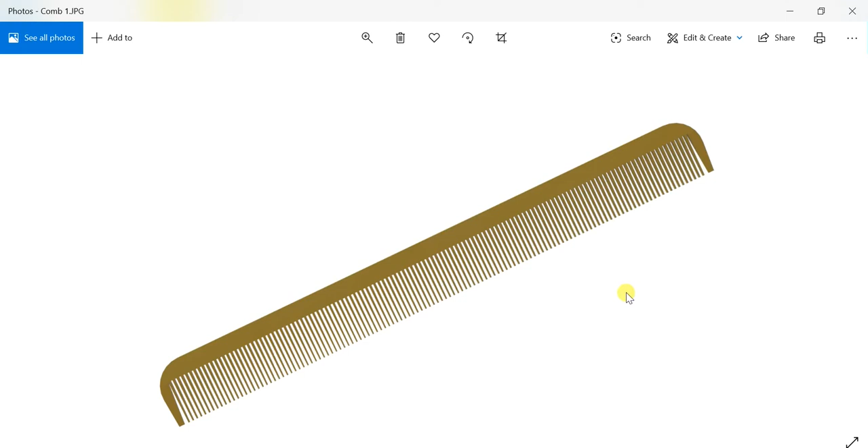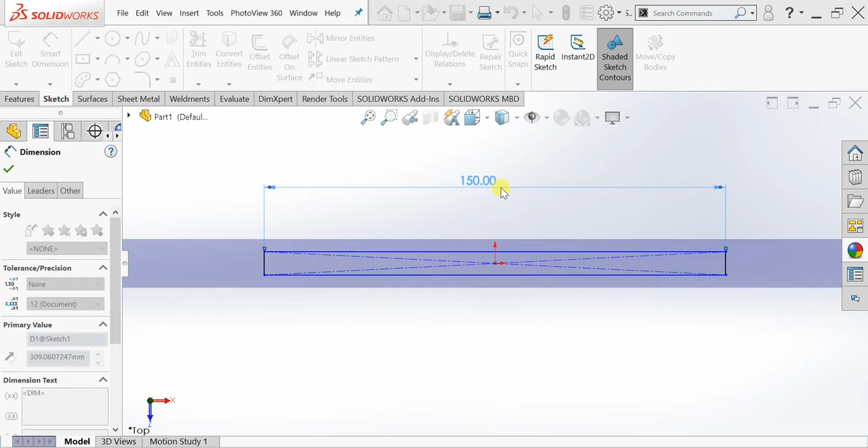Firstly, we will choose the top plane, sketch command. Just draw one center rectangle. Select this smart dimension command so that we can give dimensions to it. Select 150. All the dimensions are in mm. This length you should keep as 7. Okay.

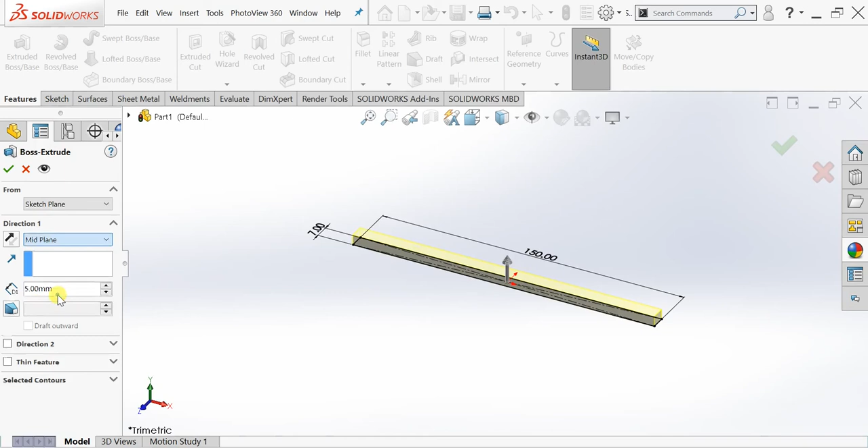Then feature extrude boss. Extrude it up to 5. Try extruding it as mid plane. Okay, for better visibility you can change the background. I have selected white. Now go on this side of the job and try sketch on it. If you press spacebar you will get an orientation tab in which you can select the front view.

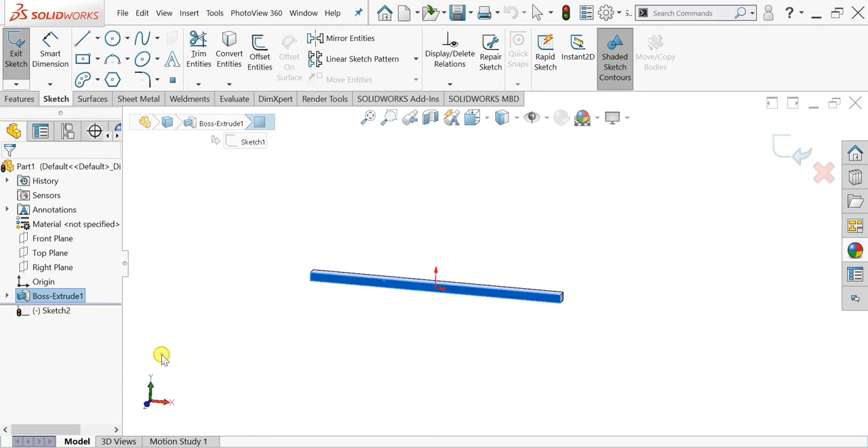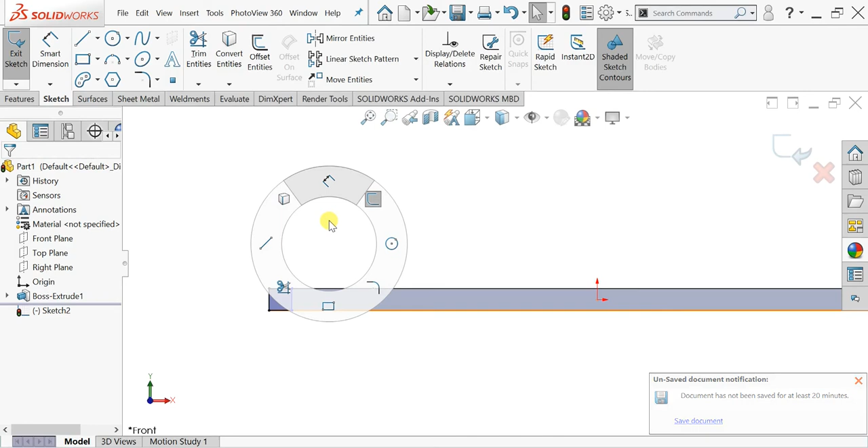Now draw a corner rectangle here. So SolidWorks gives you this kind of features. If you right click and hold it, you will be able to see this kind of a circle in which you can select many commands. So if I press right click and hold it and then press it towards this, I will automatically select the smart dimension command. So now you can give this as 5.

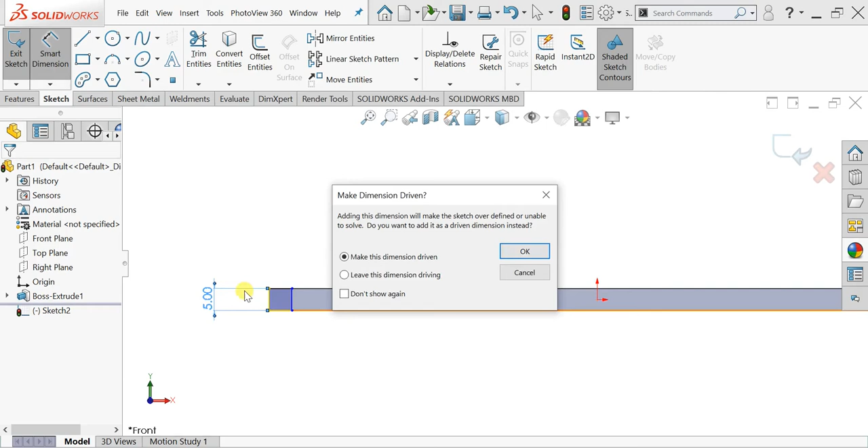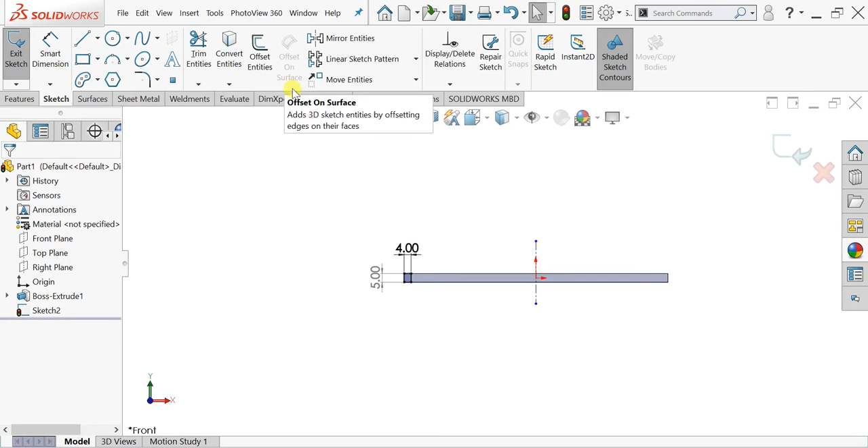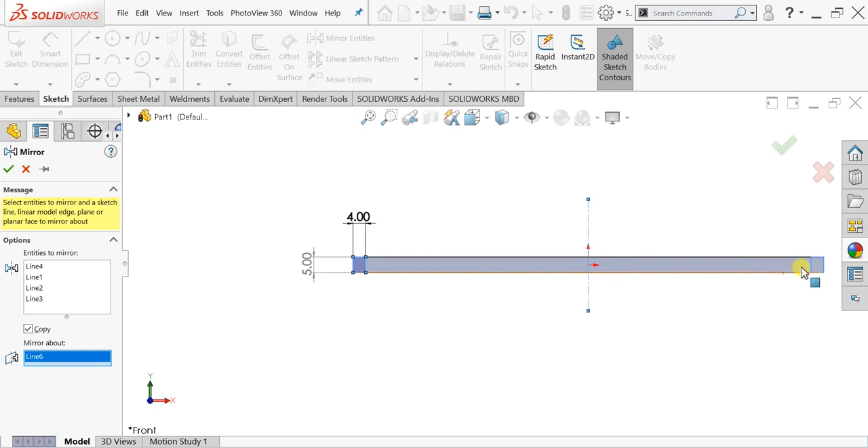It is coincident to both the edges, and the thickness of this whole plate is 5 mm, so it is automatically set. This we can set to 4 mm, and then select OK. Draw a center line and select this sketch and press mirror entity. So it will ask you entities to mirror, which is this entity, and to mirror about, that is where the reflection has to fall, which is this. So if you can see clearly, it has appeared here.

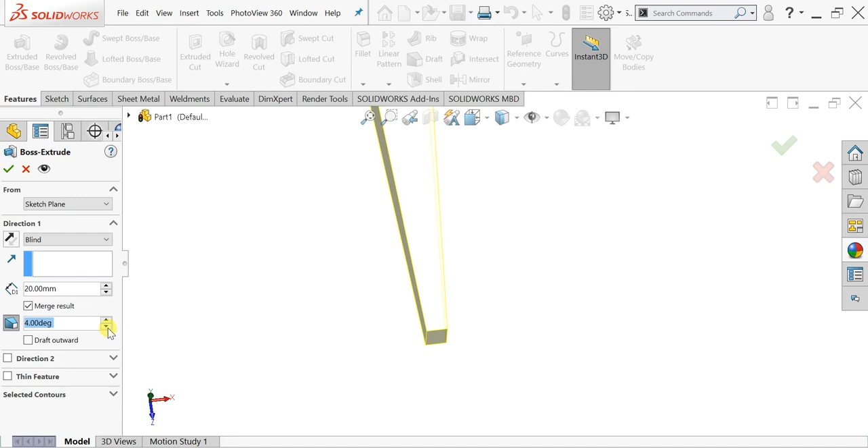Now press OK. Now click features, extruded boss. Now you can do it till 20 mm and click on draft angle. With draft angle you can linearly reduce the angle of the whole job at the end. I have kept it at 4 degree, which is not looking right. I will do it at 3 degree. Now it is fine. Okay, now we have formed both the edges of the comb.

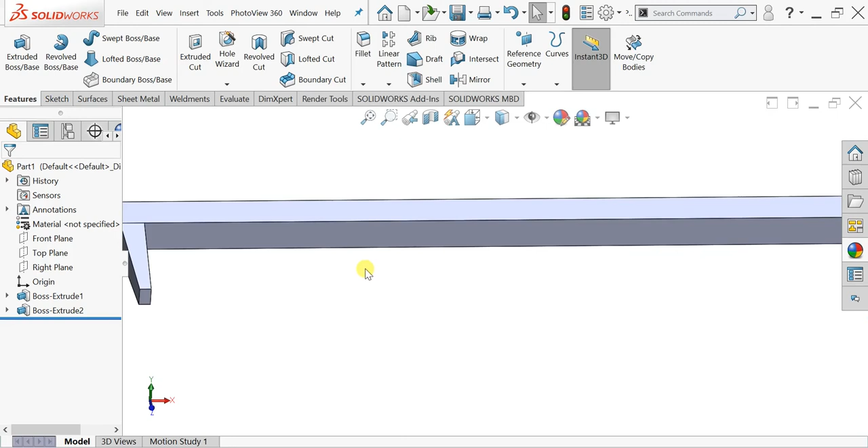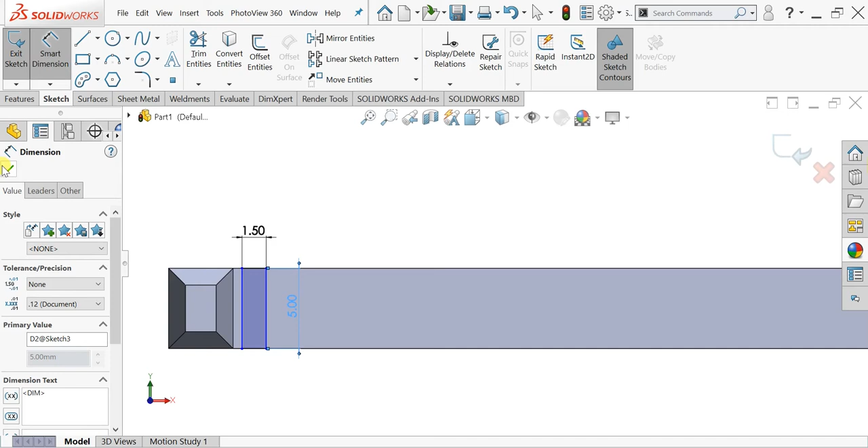The second thing we have to do is the internal small edges. Click on sketch, then go normal to that plane, select a corner rectangle and draw a rectangle having 1.5 as one side, and this side is automatically 5 as it is coincident to both the edges. Then click OK. Click on feature, do this.

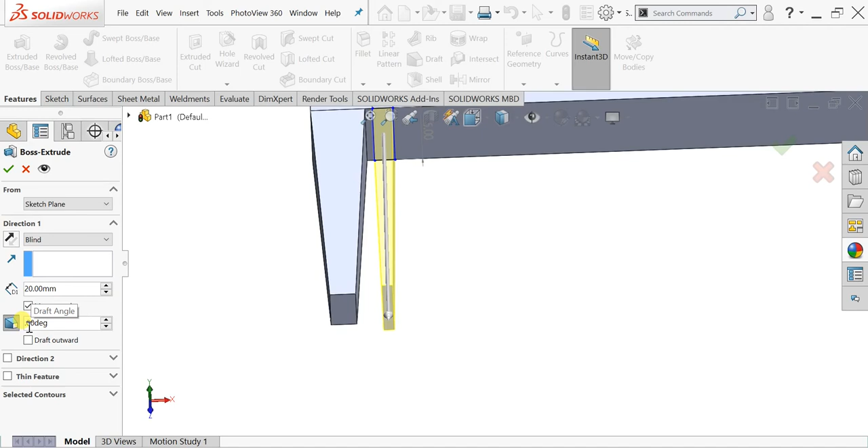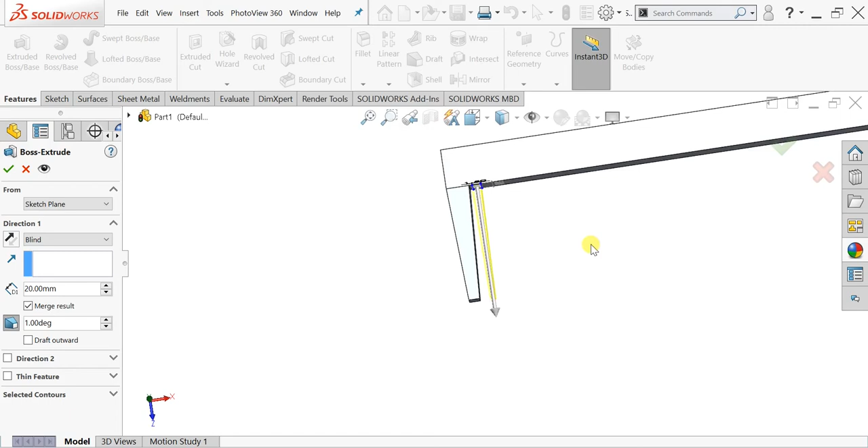Click on draft. 3 degrees is too much because it is not matching the dimension. Click on 1 degree. 1 degree looks fine. We'll try 0.5 degree. 0.5 degree doesn't look that fine, so we'll go with 1 degree of draft angle. You can also do outward. In that case, the smaller portion will be at this edge and the larger portion will be at this edge, which we don't want. So we will draft inward, which is this. Then we'll click OK.

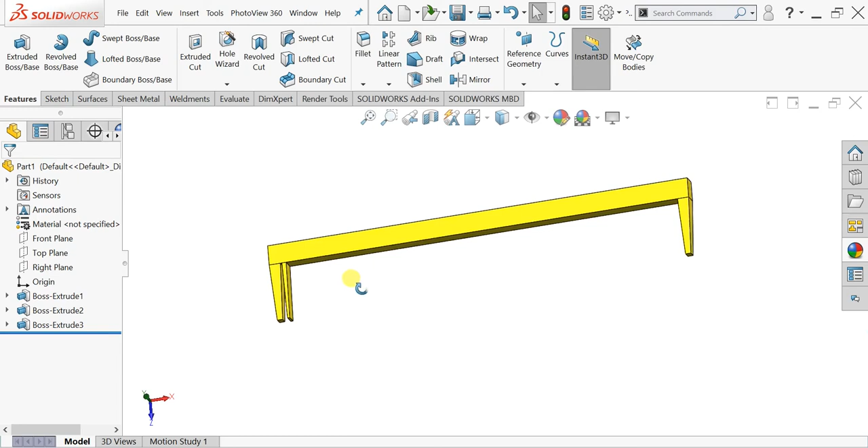Further, we want to repeat this pattern all across. Okay, I'll change the color of the whole body so that you guys will be able to understand it easily. Medium gloss plastic, I'll choose yellow color. So what we will do is we'll fillet these edges at 1 mm, both the sides. Okay, 1.5. Okay, this looks a good design.

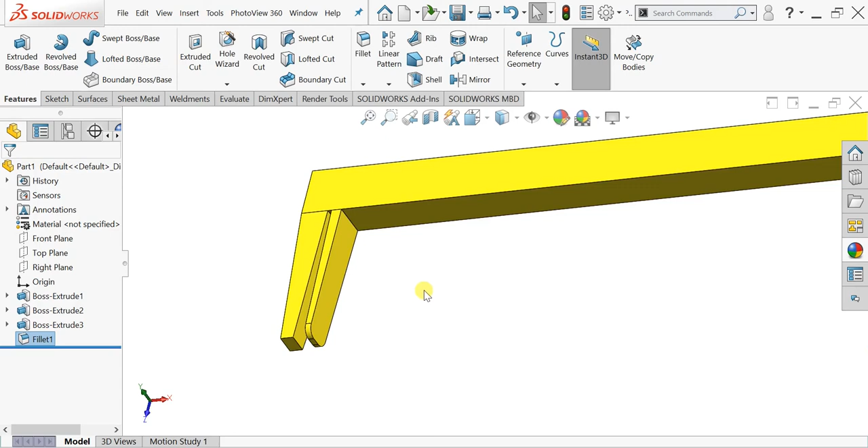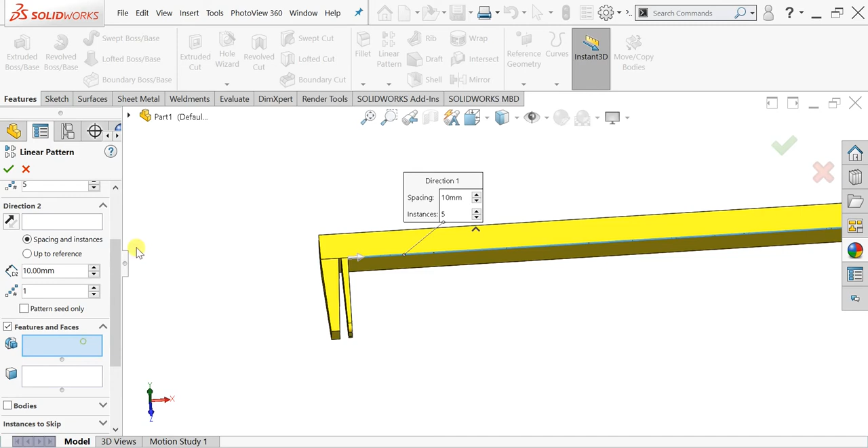We will try to repeat this whole pattern till this point. To do that, select linear pattern, then choose the direction we want to go, and select the features to fillet. Go here and select this as well as this filleting, these two operations we want to do. Now it asks for the direction of edge 1, how many instances we want, and the distance between them. We'll keep distance as 2 mm.

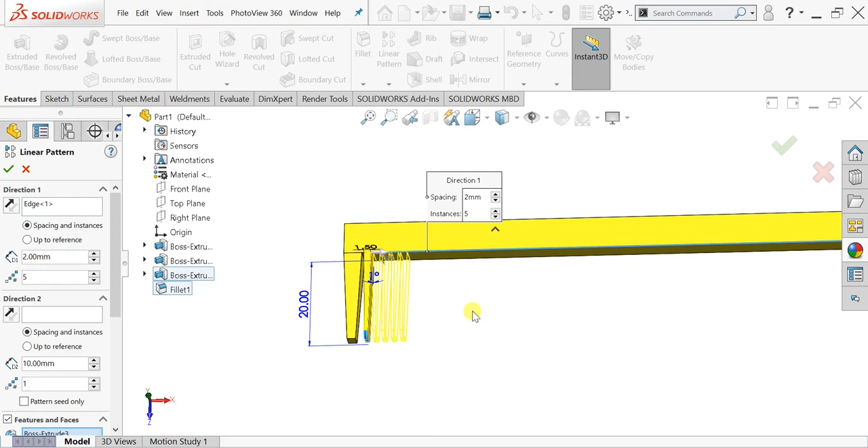That is right, this looks fine. Now we can increase the number until we reach that edge. Okay, this looks fine. So if we press OK, we have got a very crude version of our comb.

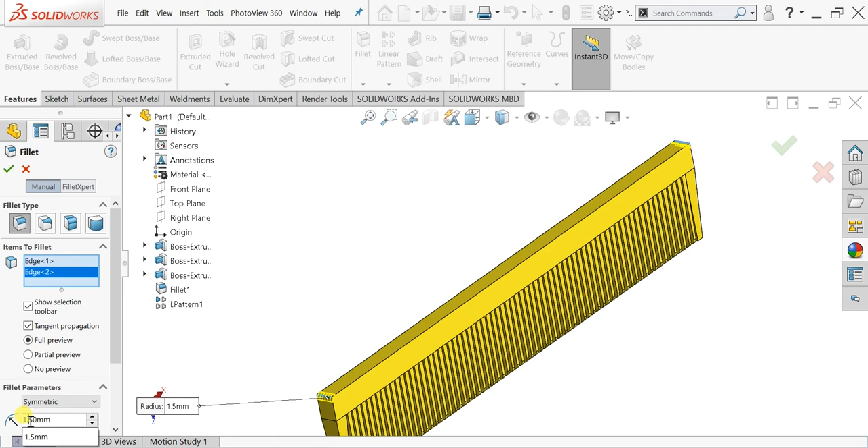Now we'll add some fillets and it will start looking like a real comb. Here you can choose up to 3 mm. I think 1.5 mm will also work. Okay, this looks more like a fillet.

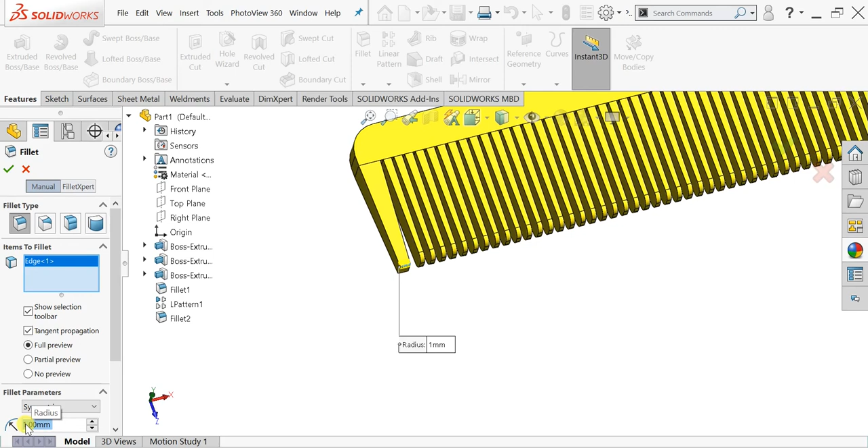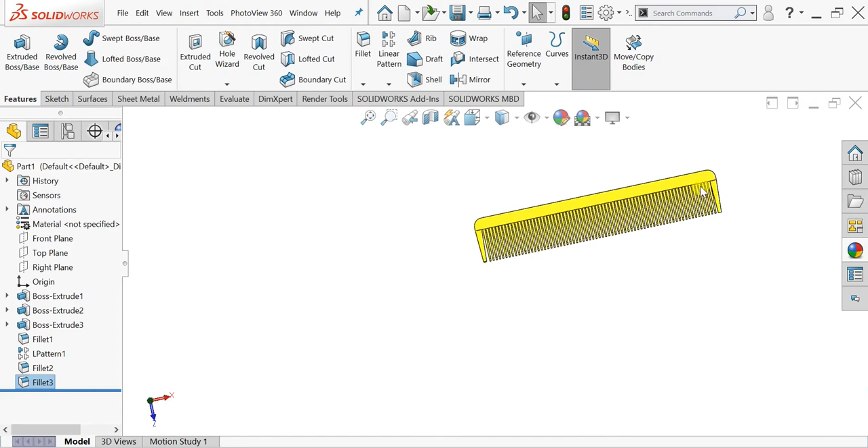We will also fillet these edges at 1 mm. This will reduce its height, but in that case we'll try using 0.5 fillet. Same for this fillet, all the 4 edges, and this is it.

Okay, here is how our comb looks. You can do any kind of modification.

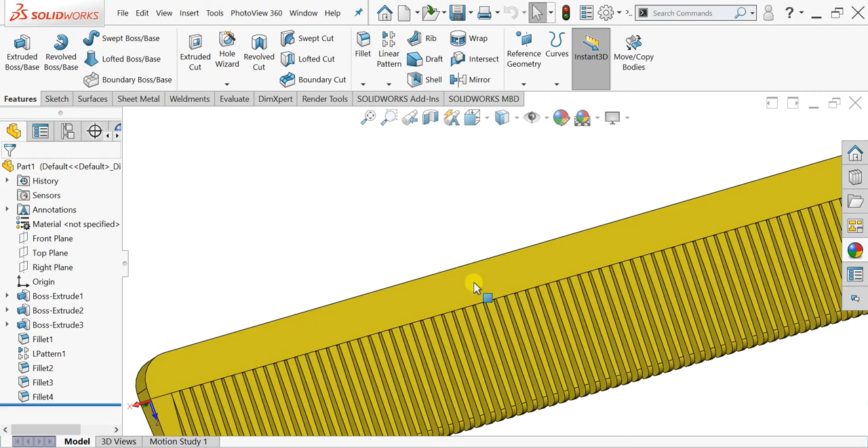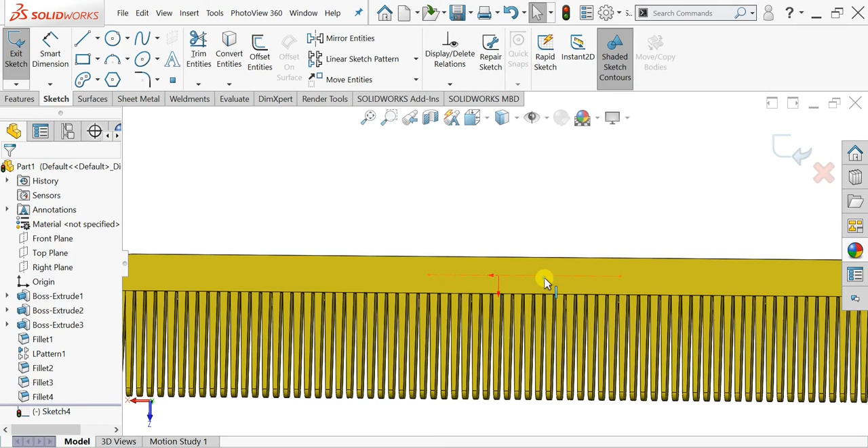If you want to write something on this surface, go to sketch, select the face for that specific part where you want to write something, then give one reference line to it. Try keeping it in center, coincident.

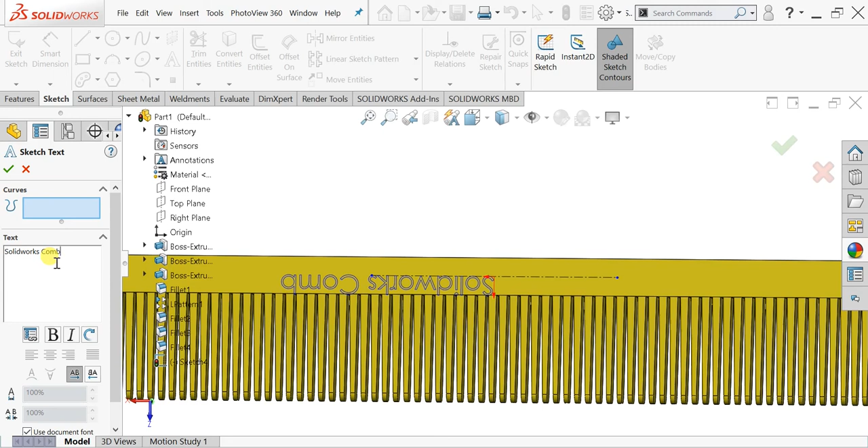Now we can select this text tool. You can write 'SolidWorks comb design.' In this case it is upside down, so we can change its angle.

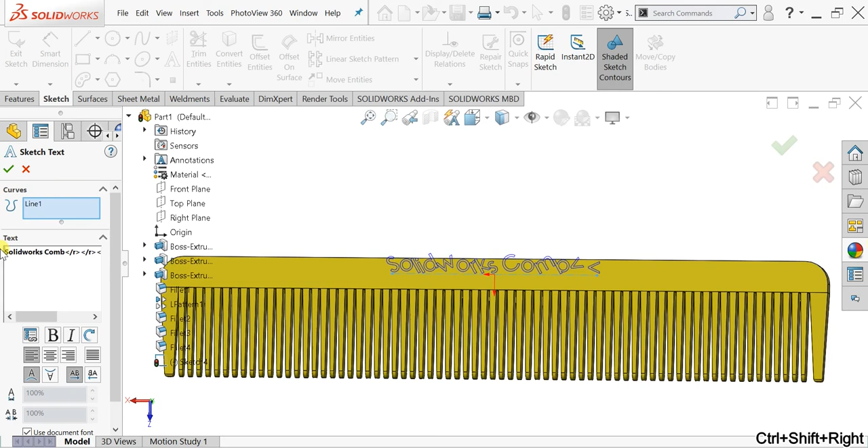Okay, here it is. So basically we selected this line here so that it was in reference to it.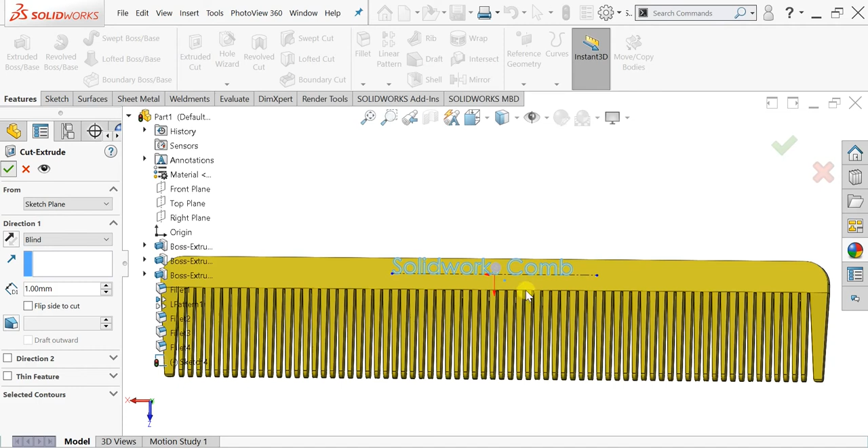This looks fine. We can do a simple 1 mm cut on this. Okay, this is how it looks now. Then you can change the color there, and now this is how it will look.

That's it, guys. Now we are ready to do the rendering of our model.

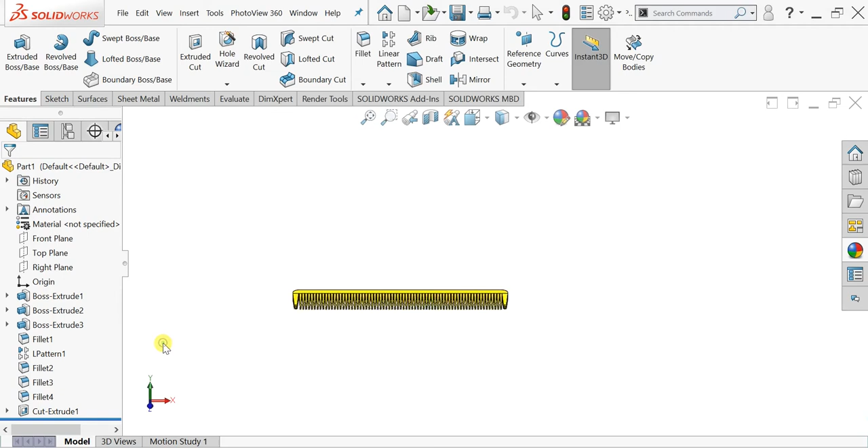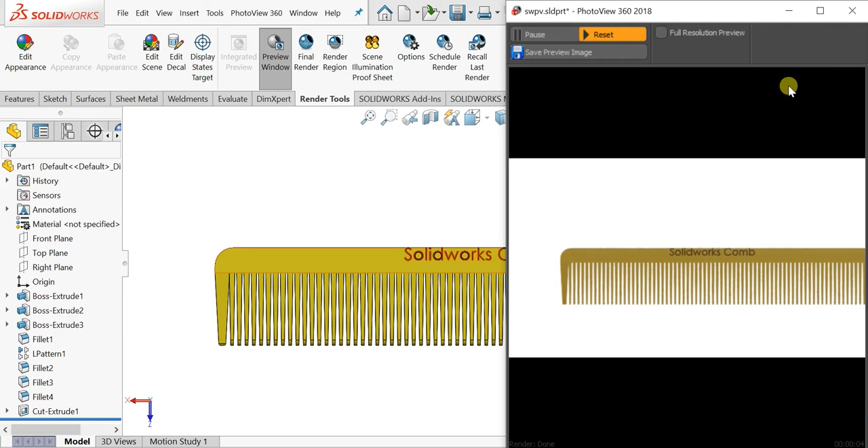For that you have to go to render tool and then click on preview window. Before rendering, it is always preferred to see the product in the preview window so we can check that this corner issue will not come when we start rendering. We have to move it a little towards the left hand side. Again, do the preview. Okay, now it looks fine.

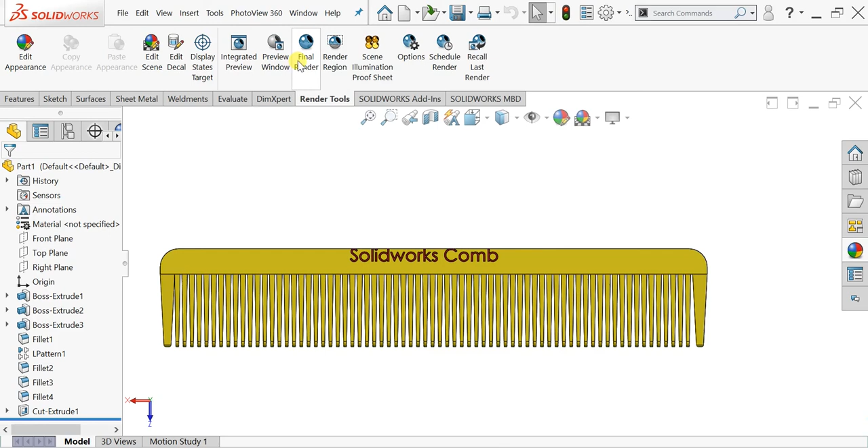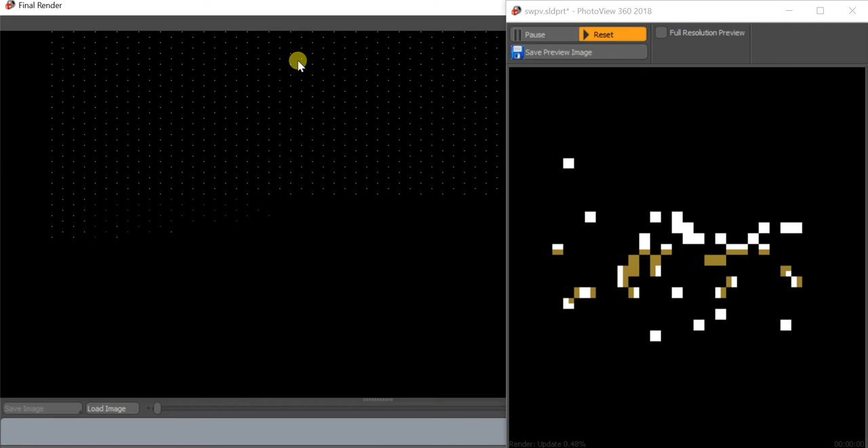So in that case, you can click on final render and a window will open, which may take some time depending on how fast your system is. It will show the complete pixel level forming of the whole comb.

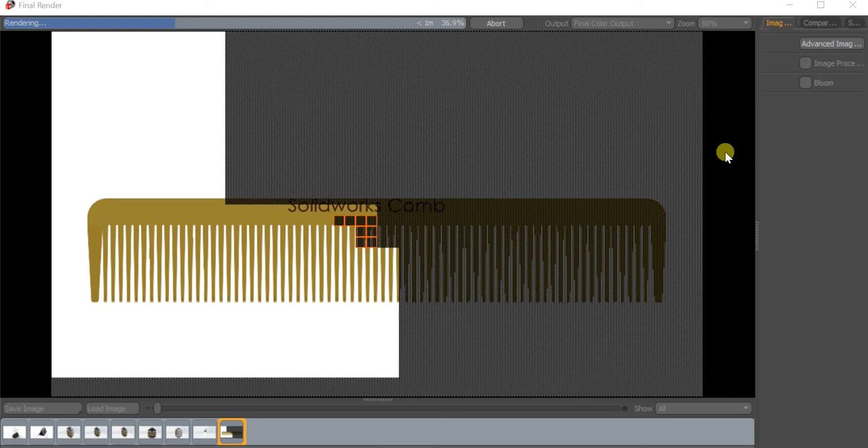This is the best feature of SolidWorks which I like. There are many features like this. SolidWorks is one of the very powerful software in mechanical engineering. It can save your cost in designing any project before you actually make any physical part and then test it. This software is worth learning.

This process is called the rendering process. This makes the product look real.

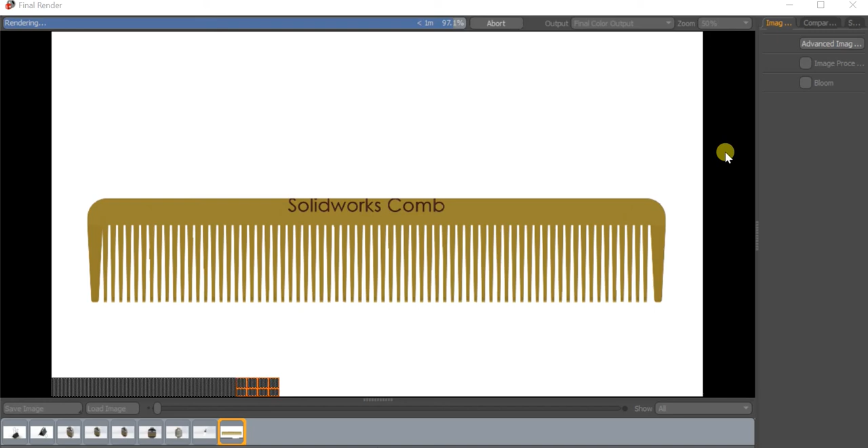Okay, the render is now complete. You can save this image as whatever name you want. I will save this as comb 2. Save and close this image.

Close this. If you want another view of the same, you can choose a different view or a very close view or any other kind of view if you want, and then you can render it. That's it, guys. This is how you can easily make a comb.